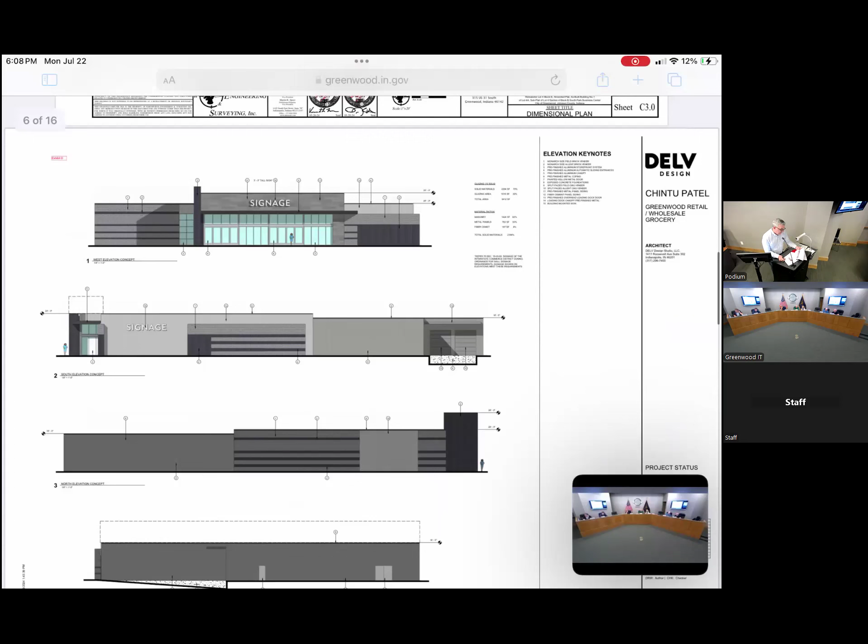On the east elevation, there would be one on the far right-hand side. That same column would appear on the far left-hand side of the north elevation, and then there'd be one near the front entrance. They're like 6x6 square tube columns that would be painted out, so they'll have a very minimal effect on the building.

We'll see if there are further drawings to point them out better. The floor plan does show them - it's nearly the last page in the staff report. Looking at it with north pointing up, there are 3 on the south wall under a canopy, one on the northeast corner, another a little farther down on the other side of the front entrance, and on the northwest corner there's a column as well.

Variance 2 was to reduce the required transparency from 30 to 25% on the east facade, our smaller facade. Because our parapet is a little higher to hide equipment, and we have that monumental wall, it throws off our calculations, so we do have a lot of windows if you just look at the ground level.

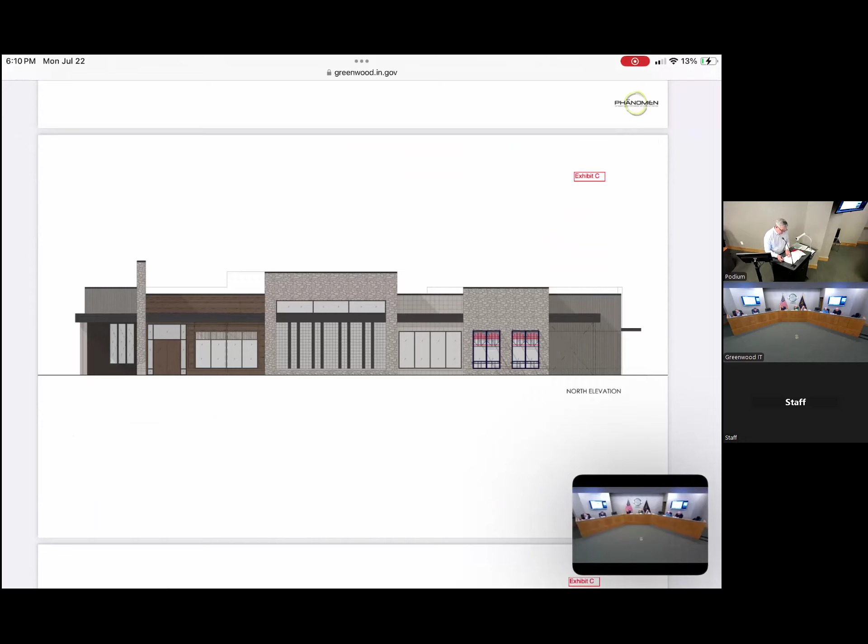Number 3 is to allow exterior materials other than the predominant front facade material on side and rear facades. This is because our south facade faces an access drive and was being considered a front elevation. What we're hoping for is that it would be considered a side elevation, so we can use a variety of materials.

You can see there's a mix of brick and stone, and a little bit of fiber cement siding, both in the window panels and from that canopy line. The canopy line is a dark bronze color that makes a strong line right above the windows.

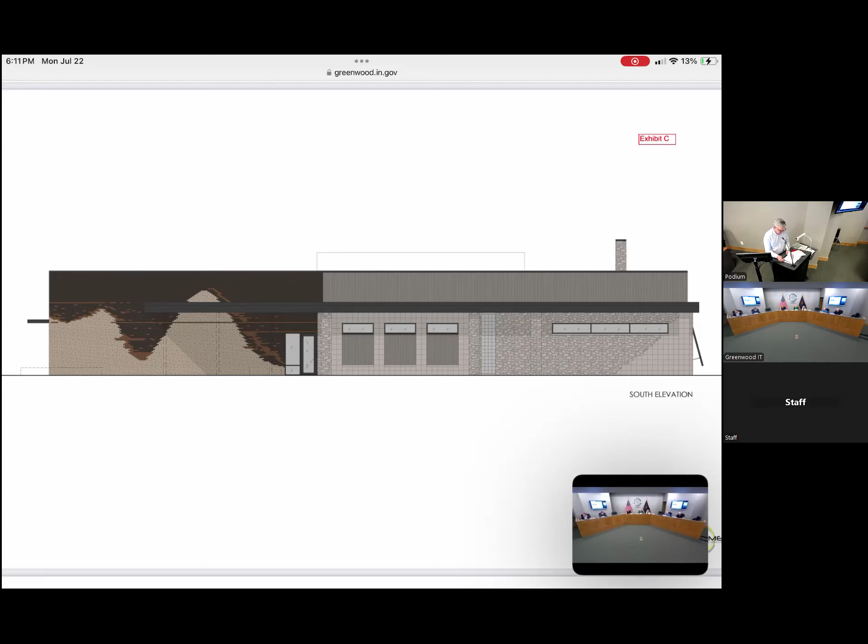Variance 4, as I mentioned, was to allow the south elevation to be considered a side elevation. Variance 5 is to allow glass block to be used on the north facade. I have this to show it's not necessarily just normal glass block - this is the backside, this would be on the inside. I assume this is what you were probably opposed to, but this will have a lot more architectural interest to it.

With that, I'd be happy to answer your questions. We'll do questions in a second, but first we need to walk through and get on the record your responses to the statutory criteria for each variance.

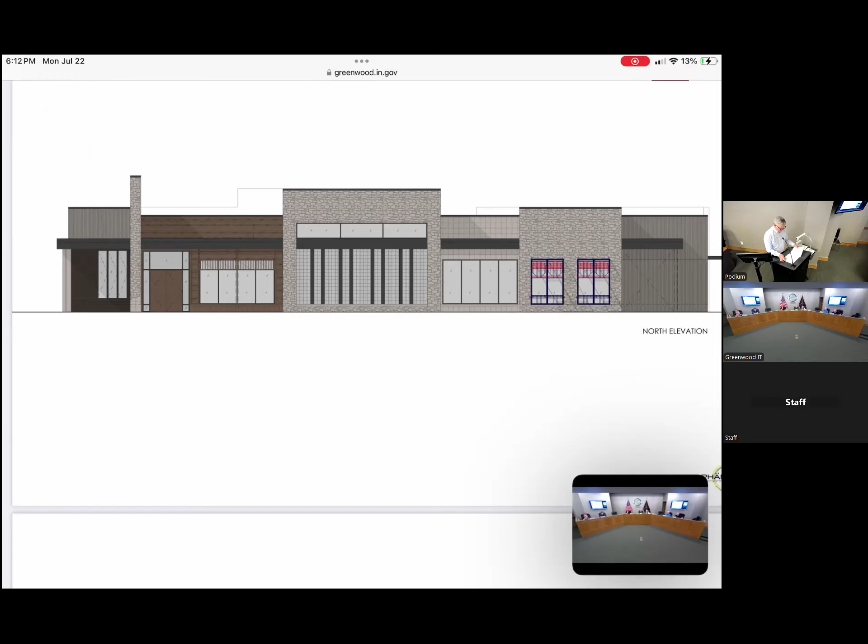So we'll go back to number 1, allow columns made of steel. Do you have your responses to those? I do. Okay, let's walk through them.

Number 1: the approval will not be injurious to the public health, safety, morals, and general welfare of the community because the proposed design for the building includes minimal painted tube steel columns that allow greater visibility of the exterior building conditions. Number 2: the use and value of the area adjacent to the property included in the variance will not be affected in a substantially adverse manner because...

The proposed design for the fascia columns will not affect the use or value of areas adjacent to the property. The proposed design places an emphasis on building with minimal columns.

Number 3, the strict application of the terms of the zoning ordinance will result in practical difficulties in the use of the property because, if applied to the building columns, the commercial building design standard would be an unnecessary hardship since it would directly impact the design of the building. The columns and exterior wall will create a dynamic 3-dimensional shift in view since they would be in different planes.

Number 4, which is the structure is not regulated under Indiana Code 8-21-10-3 for hazard air navigation.

On variance number 2, to reduce the required transparency from 30% to 25% on the front east facade. Number 1, the approval will not be injurious to the public health, safety, morals, and general welfare of the community because the proposed design for the building includes a variety of window sizes and materials. The design will not be injurious because it is only a slight reduction in transparency percentage in order to incorporate

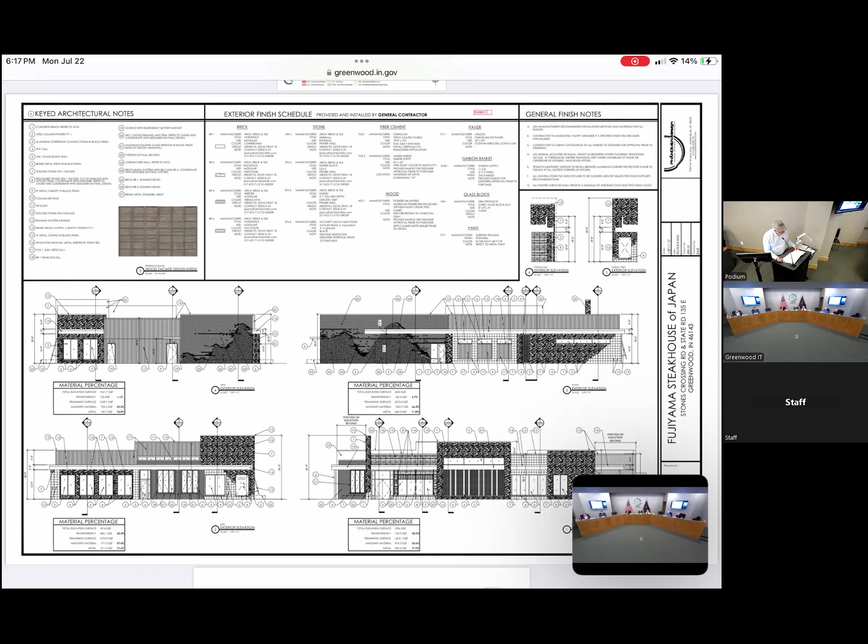Variance number 5, to allow glass block to be used on a front north facade. Number 1, the approval will not be injurious to the public health, safety, morals, and general welfare of the community because the proposed design for the building incorporates decorative fluted glass block for the monumental window on the north facade of the proposed Fujiyama building. The approval will not be injurious because the decorative fluted glass block provides a dynamic visual effect that adds to the building's design.

Number 2, the use and value of the area adjacent to the property included in the variance will not be affected in a substantially adverse manner because the proposed design for the building incorporates decorative fluted glass block for the monumental window on the north facade of the proposed Fujiyama building. Use and value of the adjacent areas will not be adversely affected because the decorative fluted glass block provides a dynamic visual effect that adds to the building's design.

Number 3, the strict application of the terms of the zoning ordinance will result in practical difficulties in the use of the property because the proposed design for the building incorporates several different window types to create different dining experiences for the customers. The decorative fluted glass block provides daylight while also providing an interesting and uncommon design feature. It provides an appropriate balance between the commercial building design standard transparency requirement and the tradition of Japanese hibachi restaurants having few or no windows.

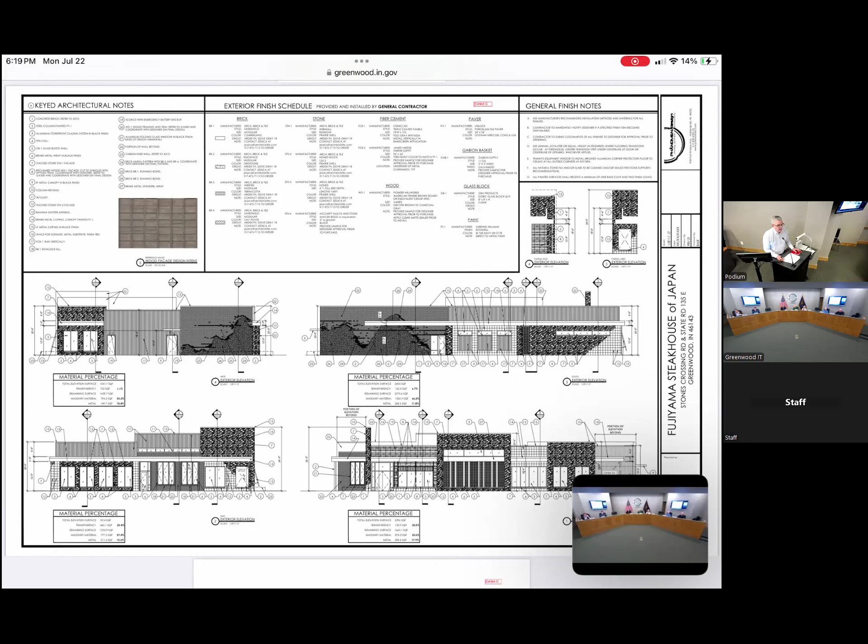Okay, thank you. Appreciate you walking through that. Anything else you would like to add before I ask staff for their comments? Not at this time. All right, staff. Thank you.

Out of the 5 variances, the only one staff is opposed to are the columns made of steel. This is similar to other requests that have come before the board. The other 4, I think, make a lot of sense.

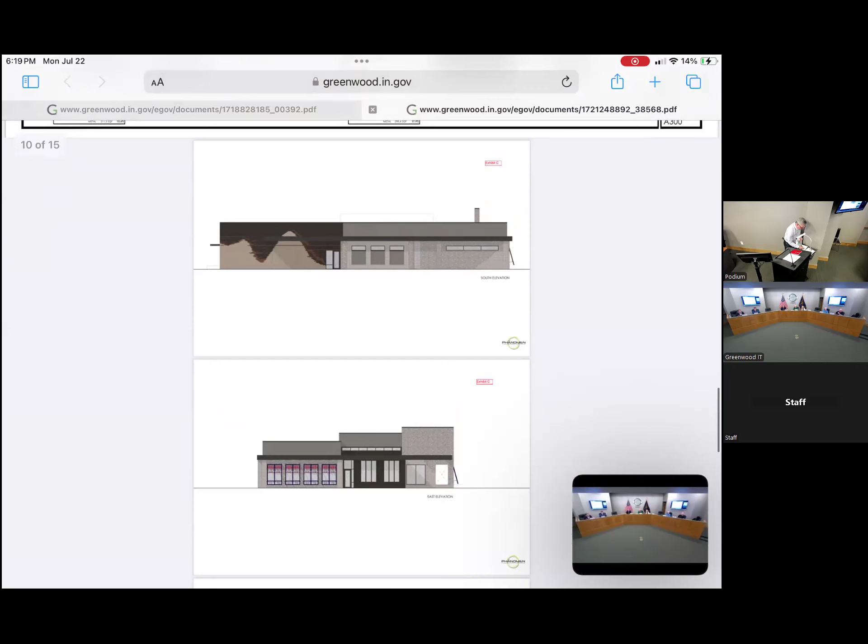The transparency, both in variance number 2 and number 4 for the restaurant, you're basically limited to where you can put windows at, and when you end up with essentially 3 frontages, you're not going to be able to put windows everywhere. I think what they have proposed looks very nice.

Variance number 3, the side and rear facades being able to use multiple materials. We are now seeing this, I feel like, every single meeting, and I still don't like it. We don't allow that, it's a negative to our UDO, in my opinion, so we're definitely in favor of bringing a variance on that one.

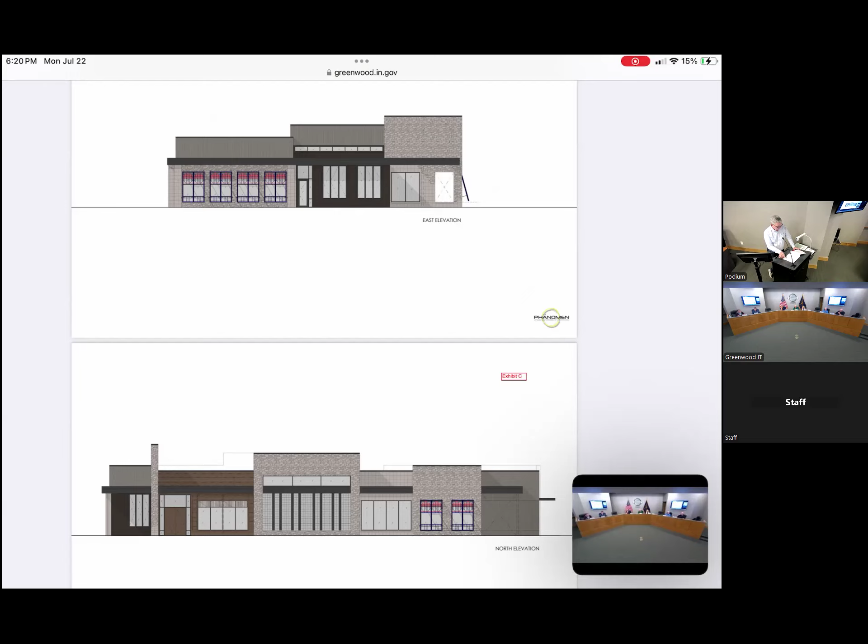Variance number 5, also in favor of, not sure why we don't allow glass block, but I think it provides a very different appearance than anything else. I'm not really sure what you could use in our ordinance that would be permitted to provide that same effect.

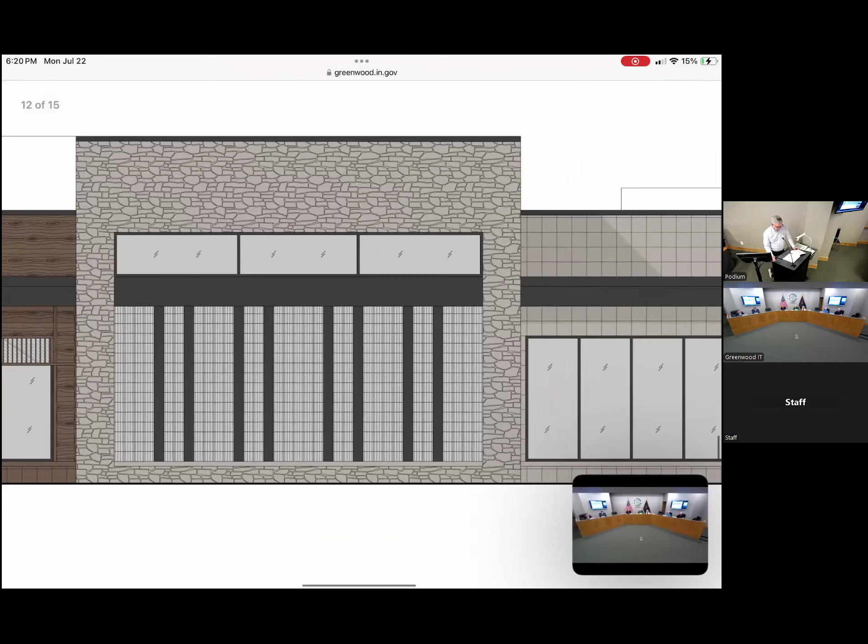So yes, we are proposing recommendation for variances 2 through 5. Only condition that substantially conform to the building elevations and site plan in exhibit C and D. Very good.

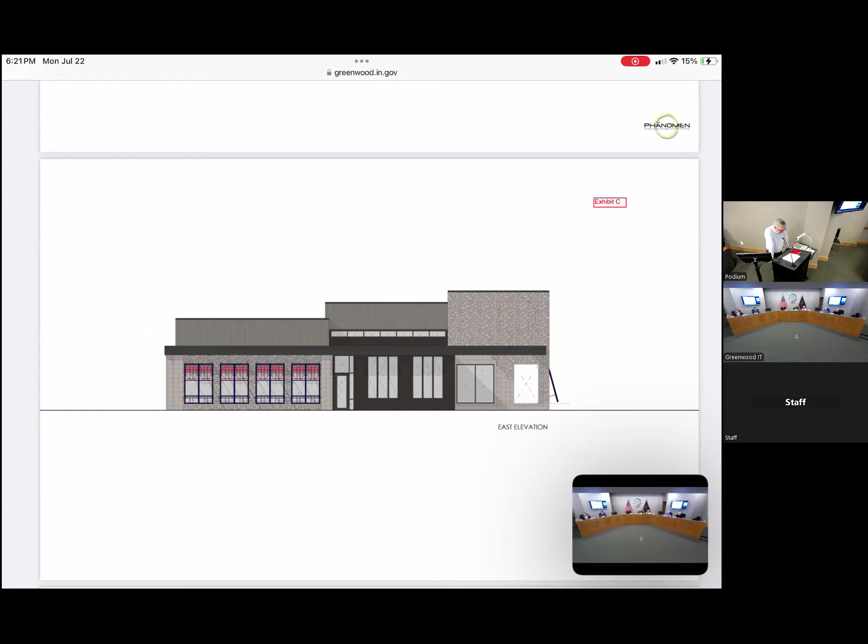Any, and you're aware of that requirement, I see there's no issues with that conforming to that? The site plan and the building elevations? Yeah, I was aware in the staff report of staff's opposition to the columns.

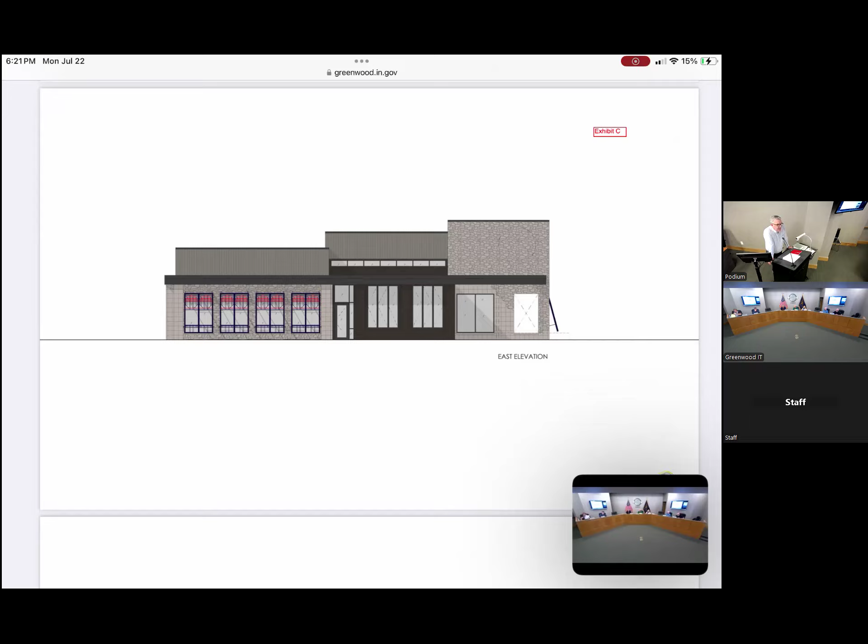Part of it, I realize every project is different. I was here last year with 2 buildings across the street. That, in our view, was a very similar thing. We were at least in one of them, choosing a decorative wood column in order, it's supporting a canopy also, but the wood was a nicer kind of material in front of the stone that we already had, and we had some glass, and we thought that material would be better, keeping it a little more minimal in size. In this case, we have a lot of stone and brick, and it really wasn't our intent.

These columns aren't holding the building up, right? They're decorative. In some ways you can look at it like it's bamboo or something like that, where you're getting very slender pieces, and they're maybe a couple feet out in front of the building elevation, because we have, like I mentioned, that canopy detail that sticks out a couple feet, and so they're under that. The idea is that you're getting kind of a shifting viewpoint as you drive by. If we wrap them in stone, they would basically become part of the building, because there's not that much space in between.